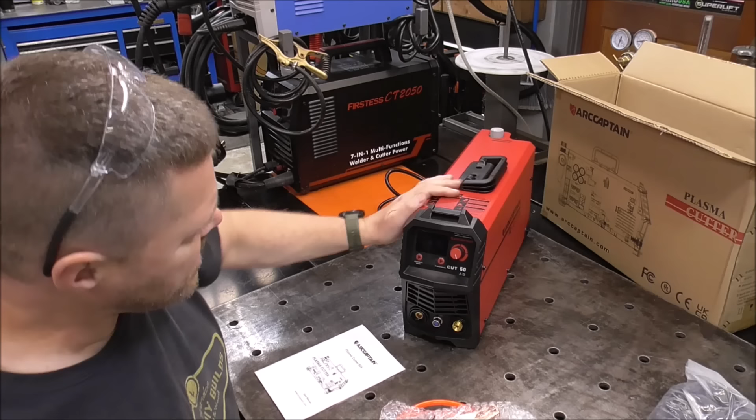Alright, so right off the bat, I'm seeing that it's unusually thin. This is a lot smaller than most cut 50s. Oh, I like this. Look at this. It's got the gauge built into the side. Kind of a little different. Yep.

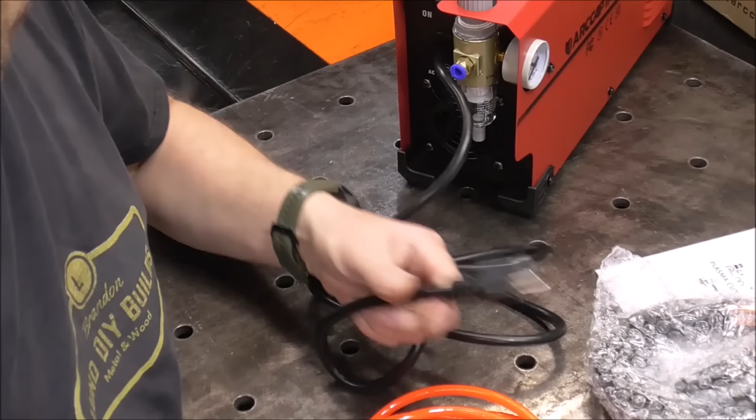Nice compact unit. For you guys that only have 120 volt power in your shop, this will be great for that. But if you have 240, you're going to want to utilize that by plugging this in to this, and then plugging this into your wall.

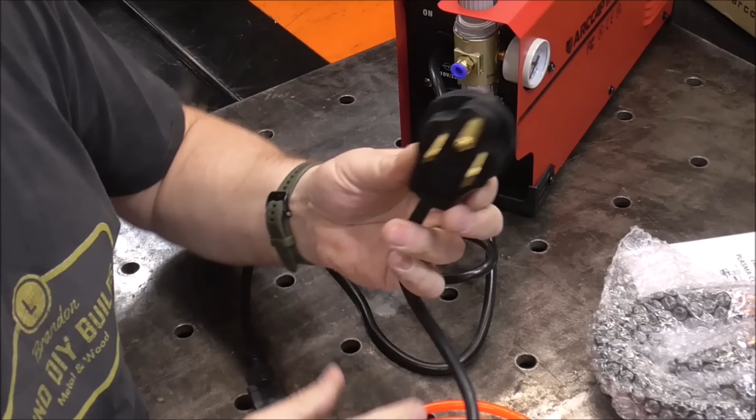I'm going to pull the accessories out. Like I say, these will be a little gently used, guys. When I'm done, I'm going to box this all back up, throw it back into the box, tape it up, and we're going to be sending this off to one lucky winner.

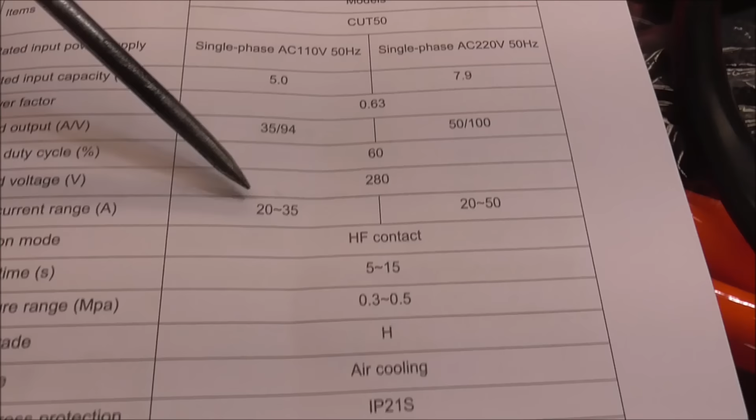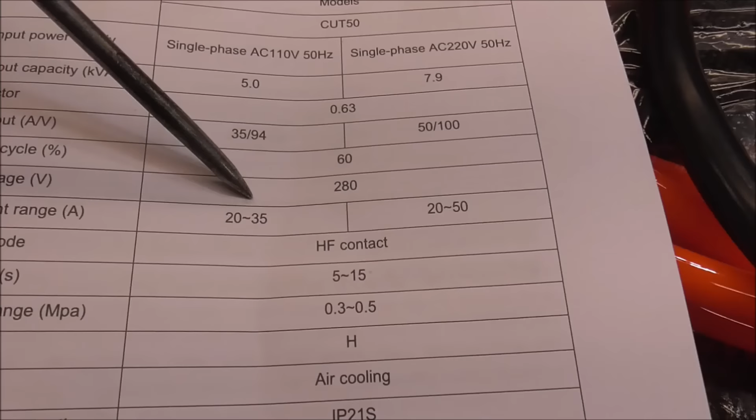Here's some good information you'll want to know. On 120 volts, this machine will go from 20 to 35 amps. On 240 volts, it'll go from 20 to 50 amps. So you get an additional 15 amps of cutting power when it's on 220.

So if you're wondering what that works out to be on cut thickness...

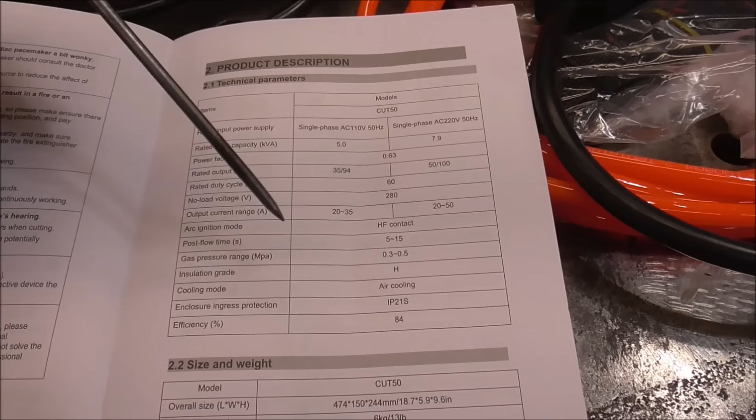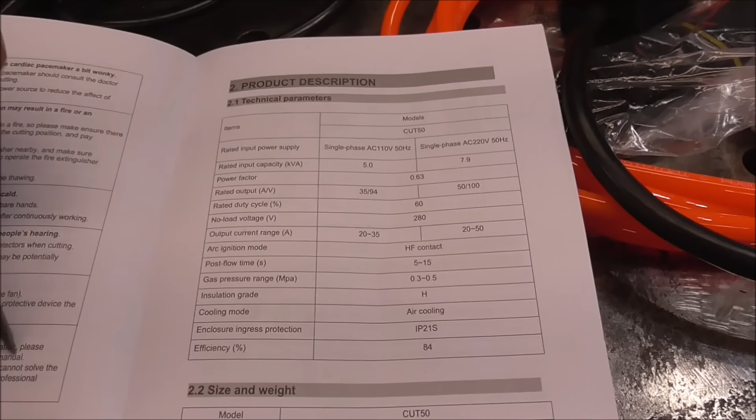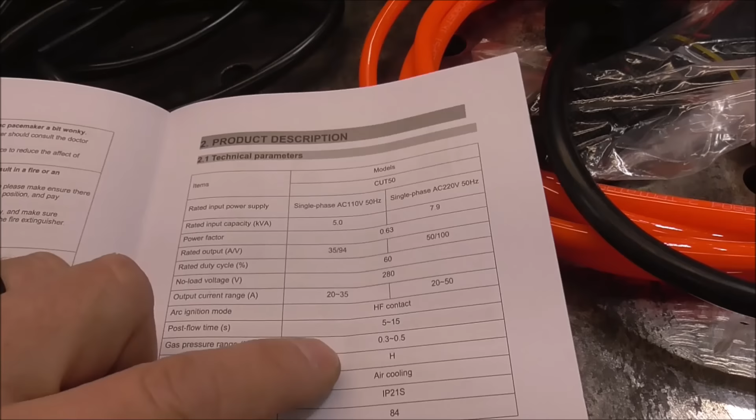Here's the weight on that machine: it's 6 kilograms or 13 pounds. The cutting torch is 16 feet long, or 5 meters.

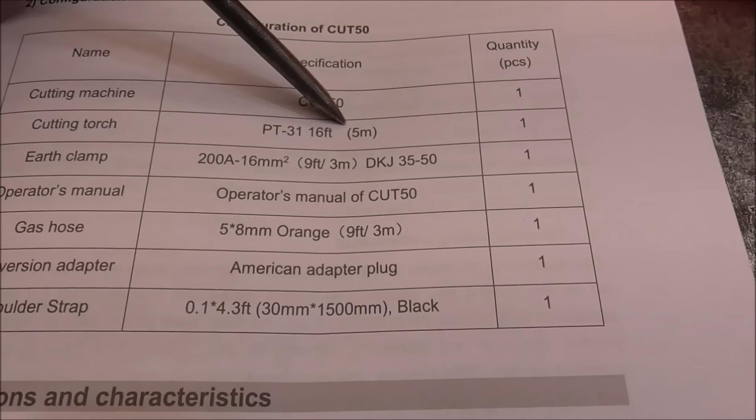This gas hose is basically your air inlet. You push this in there, then connect this end to your air source. I'm not going to use this, so I'll set it aside. What most people do is put an air fitting in this, like a quick disconnect air chuck, then just stab your air hose onto it, so you'll have everything you need if that's how you want to hook it up.

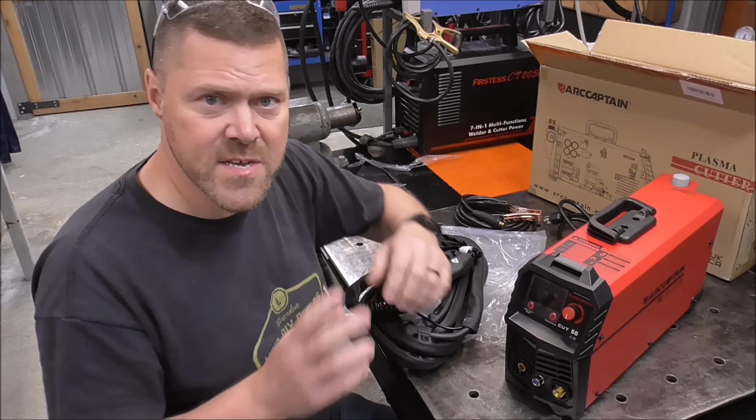If you don't know what pilot arc is, it's this: when you squeeze the trigger, it initiates the arc. The advantage of pilot arc versus non-pilot arc is that it vaporizes any paint or rust prior to making your cut, so you don't have to clean it to bare metal to start the cut. With a non-pilot arc, you actually have to make contact from the tip to the piece you're cutting, which isn't advantageous if you have paint, rust, or it's just not clean.

This is a standard PT31 torch, guys, and consumables for these are super cheap - I mean super cheap. You can buy bags of these for next to nothing, and they're all pretty universal. This is your ceramic cup.

This is what's called a drag tip. It's called that because it has these serrations cut in a cross pattern on the end, and in the very center is the actual business end. This is what cuts - it has plasma that shoots out the center making the cut, and these serrations allow the molten metal to flow out through, so you can set this directly on your piece and make your cut.

However, if you hold a very slight gap, you're going to extend the life of this considerably. But again, like I said, these are very cheap to replace.

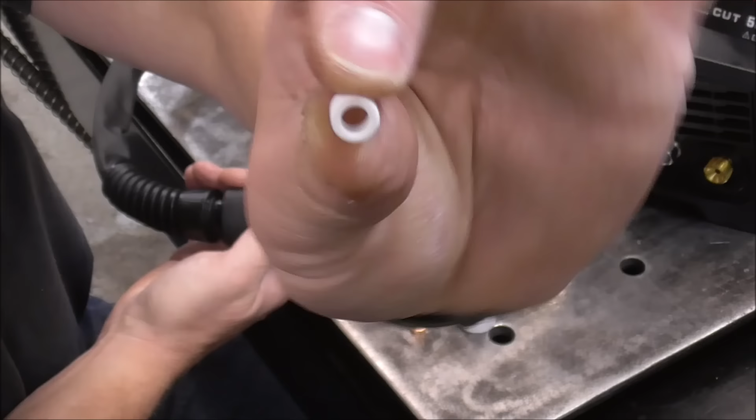Next is this ceramic diffuser - these have little holes in them. Very seldom will you replace that. Same with this, very seldom will you replace this. Generally you'll replace it once you drop it on the ground and crack it or break it.

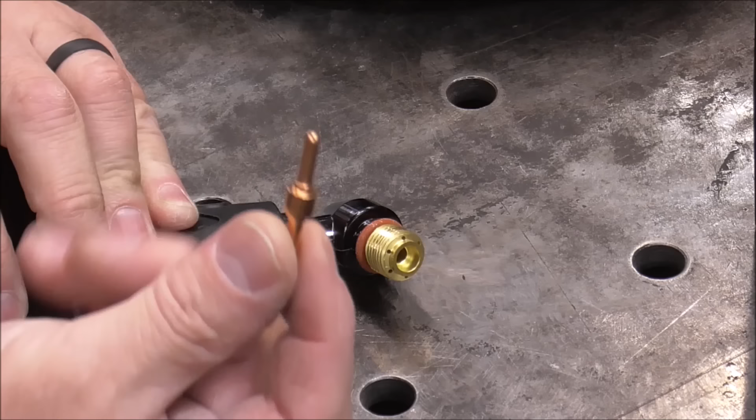And here is the actual electrode that goes down the center. That's what wears out. And that's all there is to this. So let's put it back together. So you have your electrode down the center. Then you put on your diffuser. Then you put on your drag tip or your regular tip. Then you screw on your ceramic cone.

And that's it, guys. That's all there is to the consumables. And like I said, they're cheap. You can get 20 of these for 10, 12 bucks, and they last quite a while.

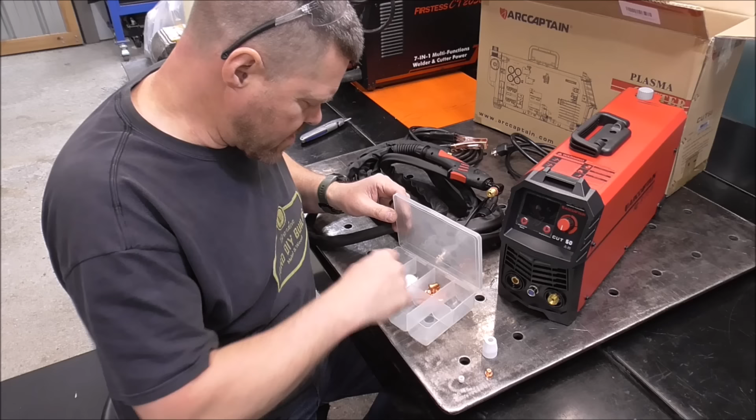I've got a little container here that I use to keep all my stuff together. So let's see, I'm going to need a ceramic, a drag tip, a diffuser, and an electrode. And again, like I said, all these PT31 torches, they're all the same. So I'll do it the same way. Throw in an electrode, throw in a diffuser, drag tip, ceramic. You can see how mine are a little bit shorter, the drag tip, but that doesn't matter.

I'm a pack rat, so I was able to make up this fitting that I'm just going to put into the back. So this side will go into that quick connector. If you guys wanted to build one, this is what I did here. It's got your quick connect fitting here. Then it reduces down to a barbed fitting. It's not pretty, but it'll work, and it'll keep me from cutting into that orange hose that is going to be one of the winners.

This is, you know, 30 years of accumulated fittings and air lines, and this goes on to, you know, a tow-behind air compressor. It's a splitter. There. All right, let's get back to it.

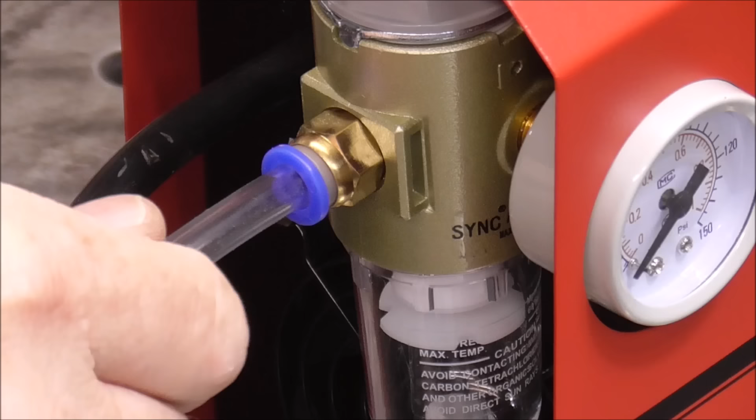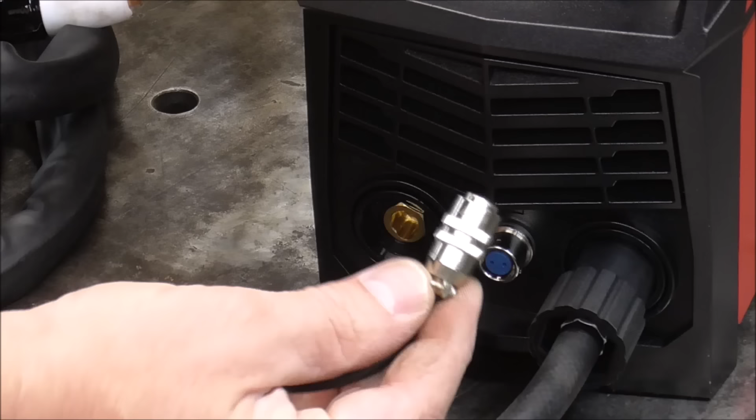We'll take this adapter and we'll just stick it on there. There we go. That's it. And to remove it, you just push it in. It kind of works like a quick connect, but we connect this end to our air compressor. Now with that out of the way on the back, now we just got to screw on the front connection, which is from the torch. Then we attach the control, which is just a quick connect fitting that pushes on. And then we put the earth on.

That's that. So that's all you need to set up a plasma cutter. You just need electricity, you need air. That's it. Because I've got 220 in my shop, I'm going to be running this off 220 volt power. So we'll plug into our adapter. Now we'll plug our adapter into the power.

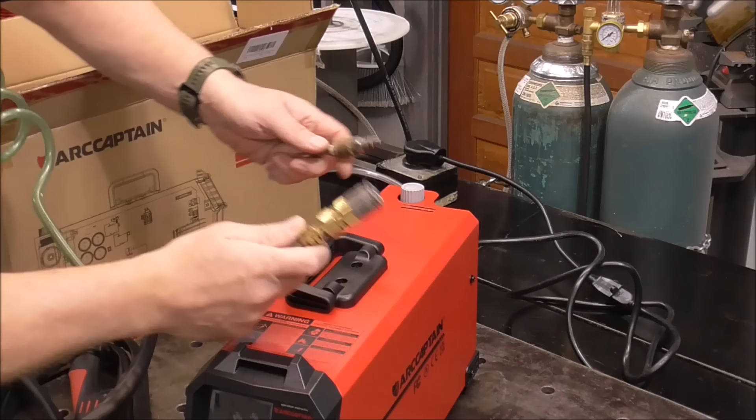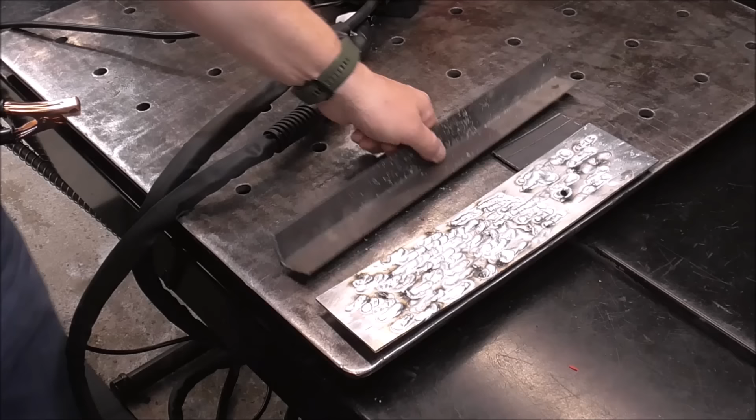Now we just got to supply the unit with some air. Got the earth or ground. We'll clip that right to our table. This is all set up, ready to go. I got some test pieces. I got some old metal bed frame. I've got some 3/16 plate. And I've got some 1/8" aluminum.

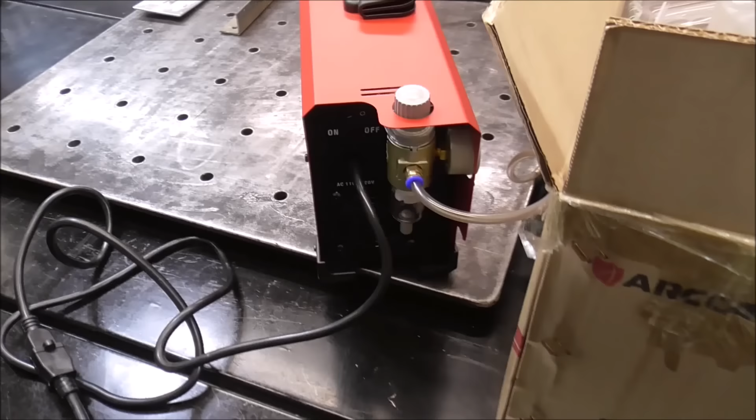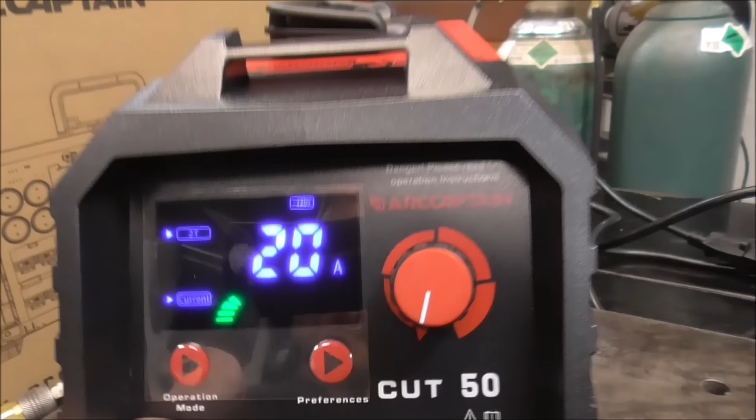We'll go around to the back, turn it on. Oh boy, nice display screen. That looks nice. Run through the settings. So it goes all the way up to 50. Oh guys, I really like that feature. Listen.

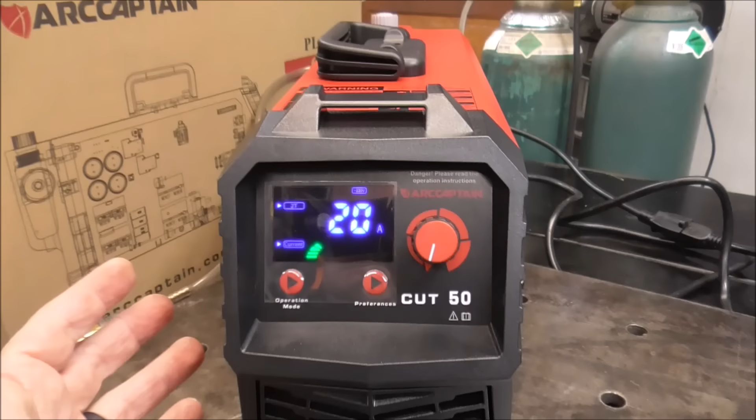Silent. It's about time these manufacturers do this stuff. It drives me crazy hearing a fan run on a machine that is just idling there, sitting there doing nothing when you're not using it. It's just running a fan that doesn't need to be running because there's no heat in it. It's just sitting there. So well done for that.

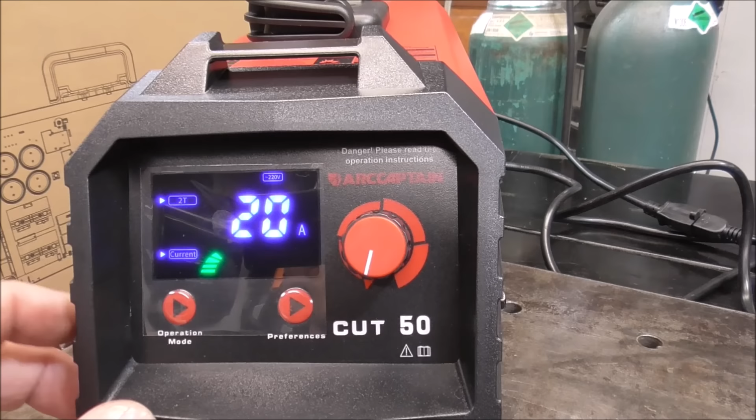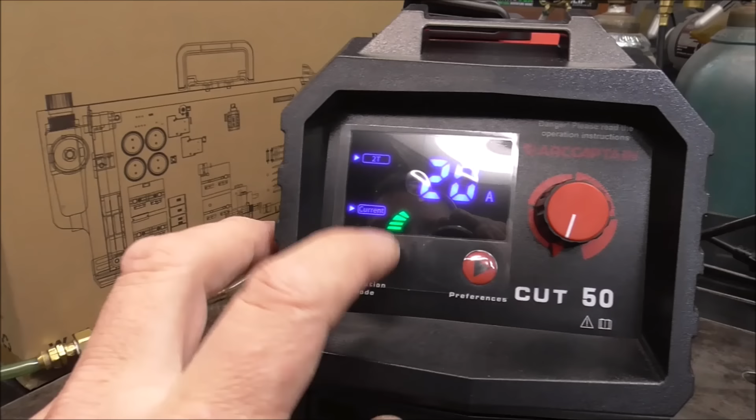Thank you. So the operation mode is 2T, 4T. Basically, guys, 2T, you just pull the trigger, the arc initiates, you let off, it stops. 4T would be, let's say you had it on a machine, pull the trigger, the arc initiates and it stays lit, pull it again, it turns off. So you'll be running it in 2T mode.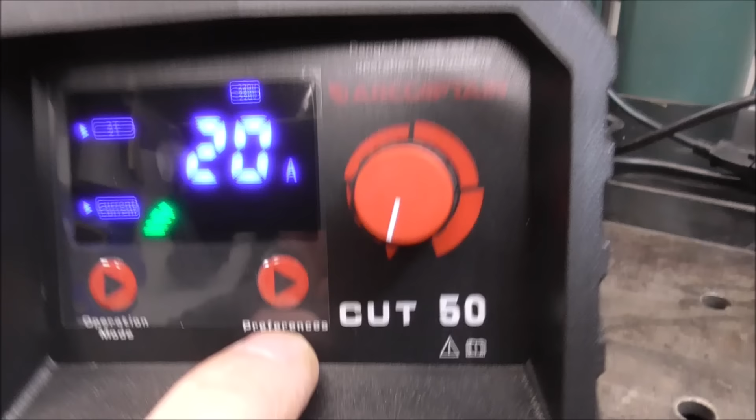The preferences, you can go down to 5, 6, 7, 8, 9, 10, all the way up to 15. And what that does is that gas or air runs through this tip for a little bit just to cool it down after you're done with the cut. So once you let off this trigger, then it'll continue to blow air out the end to keep this cooled down.

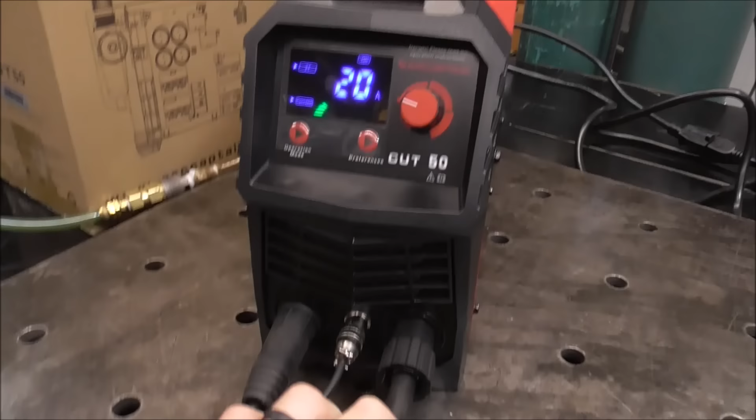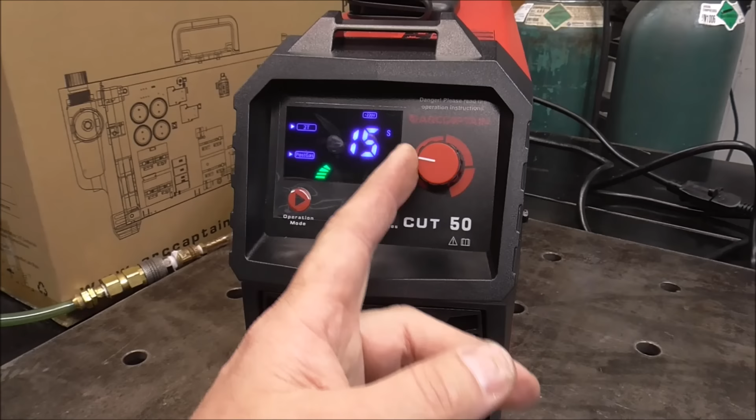So if you're cutting really thin stuff, then you may not want it running for 10 seconds, or if you have a small compressor and you don't want to utilize every last bit of air you have, and you're cutting something thin, you only may want it to go for 5 seconds. If you're cutting something really thick and you're cutting at maximum amperage of 50, you probably want to turn that up to like 15 to allow that to cool everything down, because it's going to be a lot hotter. So we'll put it on for 10. That's about a reasonable setting right there, kind of between everything.

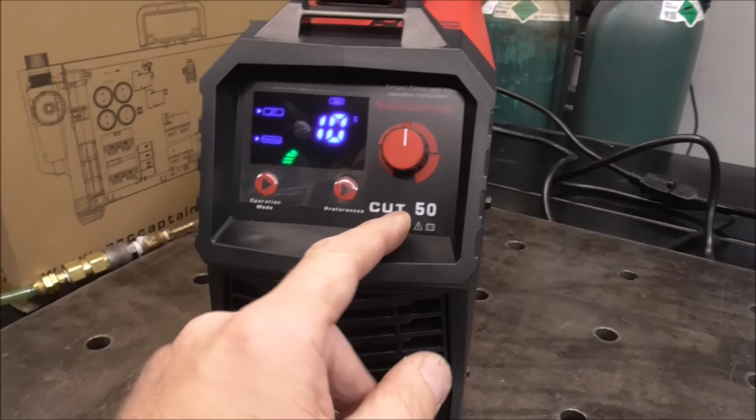Now, if you're cutting inside, you're going to want some safety gear. So you're going to want some cutting goggles, you're going to want a respirator, you're going to want to cover your arms, nice cotton, flannel, fireproof, and you're going to want some gloves. These are just regular cutting torch gloves. And preferably you're not wearing sneakers that have mesh in the toe.

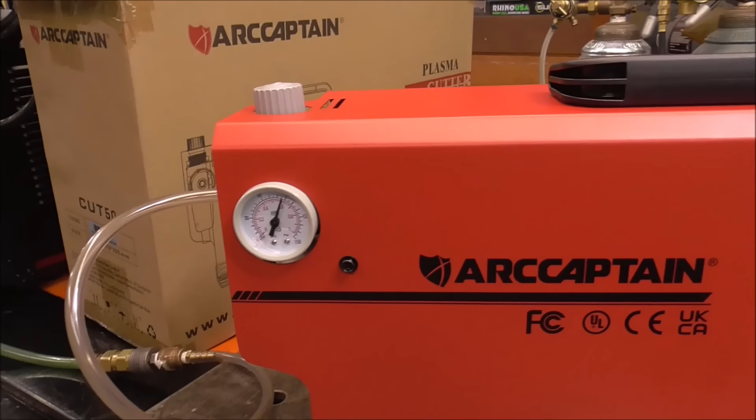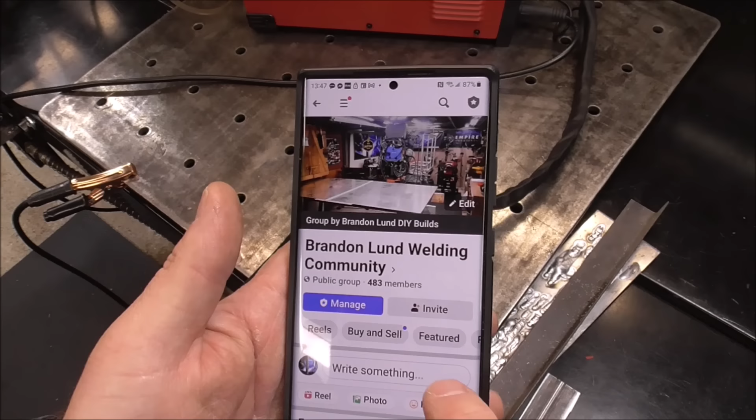Now we've got to adjust our air pressure. We're at 90 right now. Way too much air. We don't want that. So what do we adjust it for? How do we know? If you want all kinds of information, this is what I was telling you about earlier, go to Brandon Lund Welding Community. It's got all sorts of information there. You'll see all kinds of things that people are building, they're interacting and sharing their stuff.

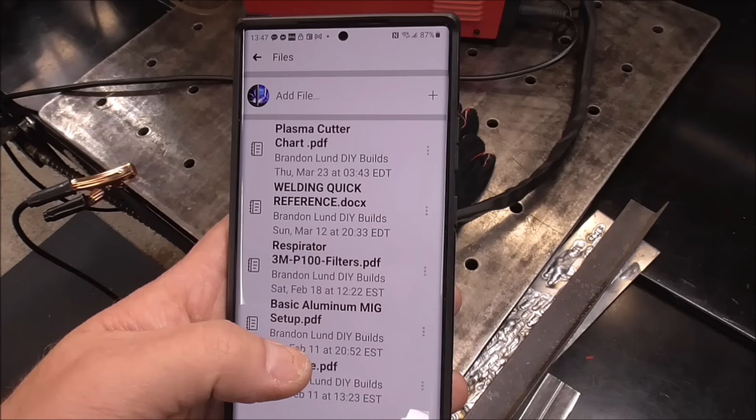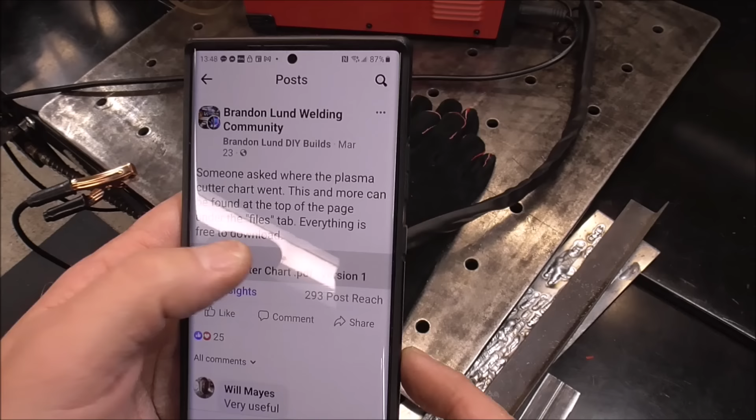But the part that you want is to go here, scroll across, you can go buy and sell, photos, files. Go over to files and then look for the plasma cutter chart. It has all kinds of other things, aluminum MIG setup. It's got the template for a fab table right here if you want to set that up yourself. It's got information on 3M respirators and what cartridges are best for what you're cutting. It's got a quick reference guide for welding, but again, this is what we're looking for, the plasma cutter chart. Click on it, it'll download, they're all safe, and here it is right there.

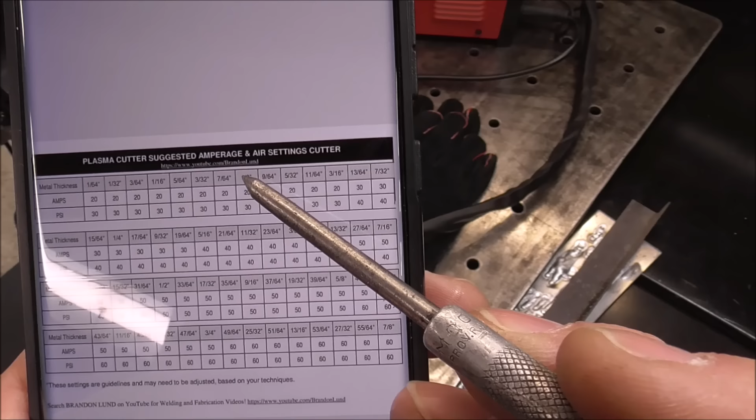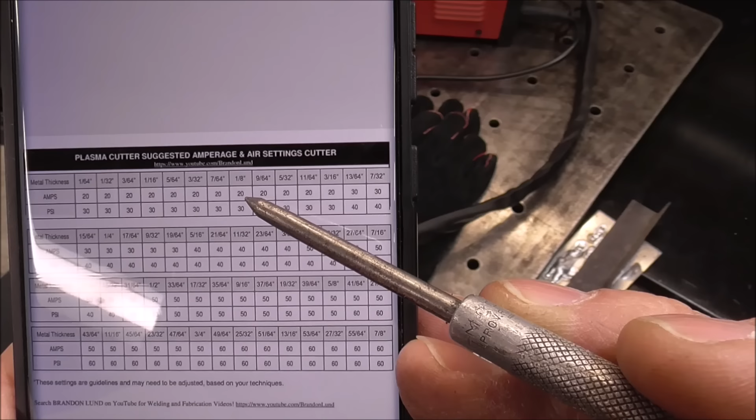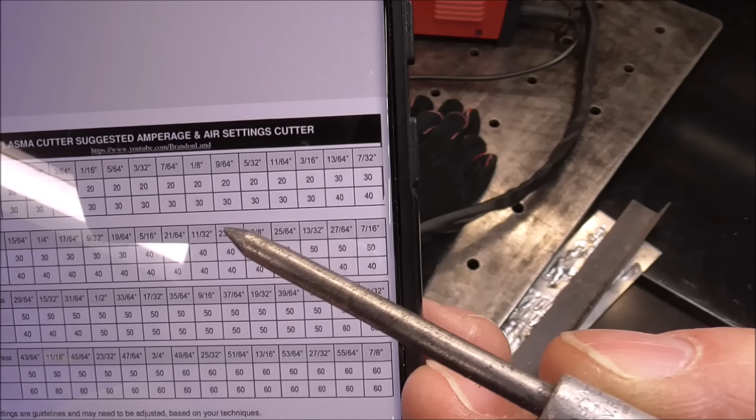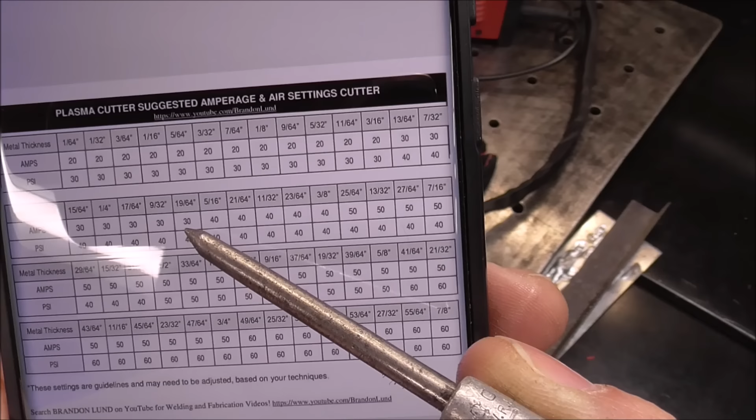So that gives you an idea of what you can cut on 120 and 240 volts as well, guys. Because remember, this I think only went up to, what, 35 amps on 120 volt. So you can cut 1/4 inch, no problem, because that's 30. 17/64, 9/32, between 19/64 and 5/16 is where it switches from 30 amps to 40. So you can cut some pretty thick metal. 19/64 is a couple sizes bigger than quarter. So you can do a lot of stuff on 120 volts.

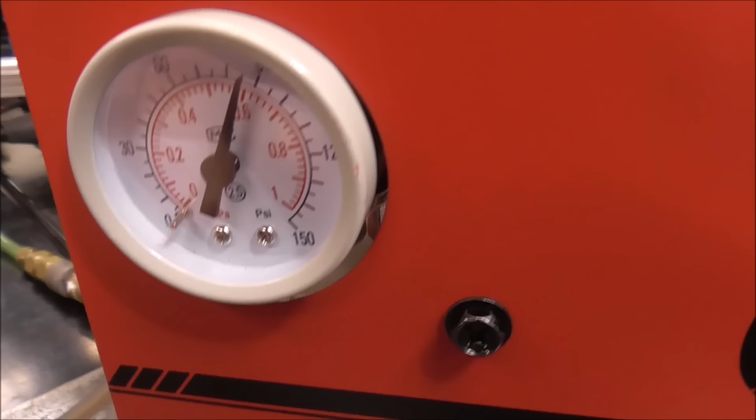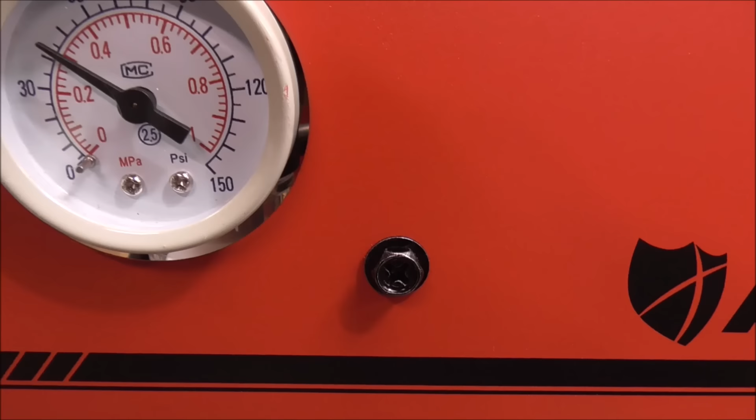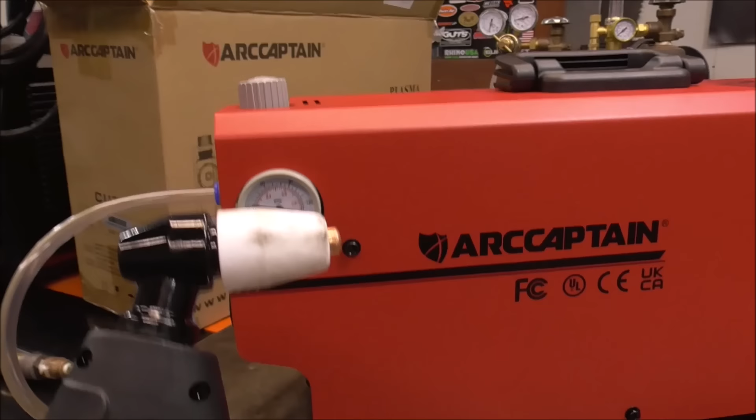But back to what we're doing. 20 amps, 30 psi. And as you can see, we're already on 20 amps. We just have to adjust this to 30. So you pull it up and then turn it counterclockwise to lower it. And if you're a little over, guys, it doesn't matter. You probably want it a little over anyways, because when you're pulling the trigger, this is going to go down a little bit, so we want to check that. So we'll pull the trigger and watch the gauge. Okay, so that's way low. Up a little more. That's pretty close. We'll probably bump it up just a whisker more.

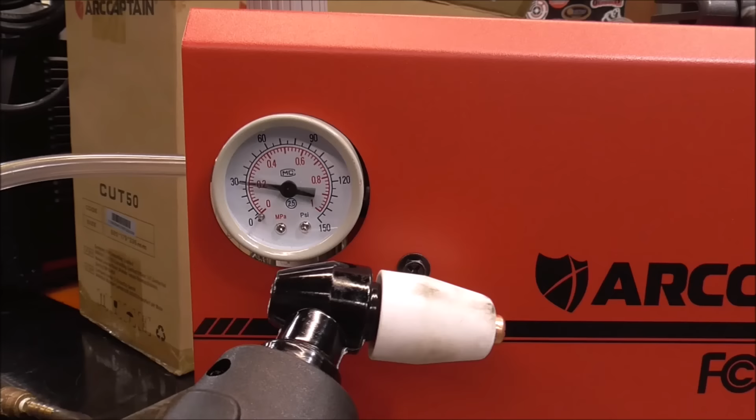And listen to that, guys. No fan, because it's not needing it yet. The circuits haven't heated up enough. So just because you pull the trigger doesn't mean the fan's going to turn on. I'm really loving this feature. What an awesome thought process. Sometimes it's the little things that mean a lot. And I know you guys that have machines that just run and run and run while you're fabbing up your stuff, taking measurements and cutting pieces. How irritating is that, just listening to that fan, wearing the fan and running your electricity up when it doesn't need to be. I love this feature. My Fronius does the same thing. It just sits there quietly until it's needed.

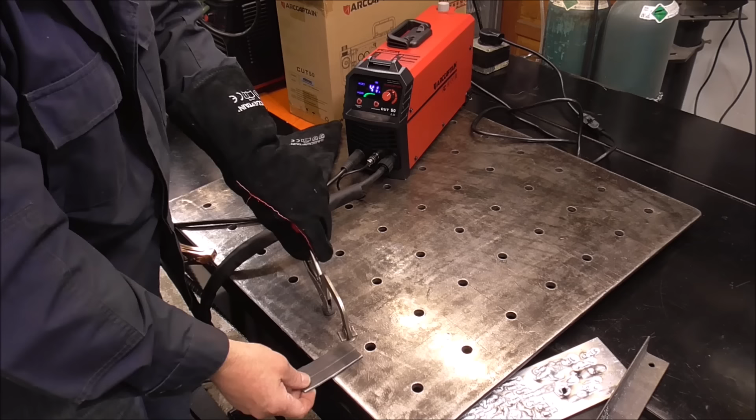This isn't a tutorial on how to cut and how to use it. We're just trying it out, making sure everything's going to work good, guys. I'll talk to you a little bit along the way about what we're doing and why we're doing it, but if you want to know the intricate details, go watch that other video I was talking about. Alright, here we go, guys.

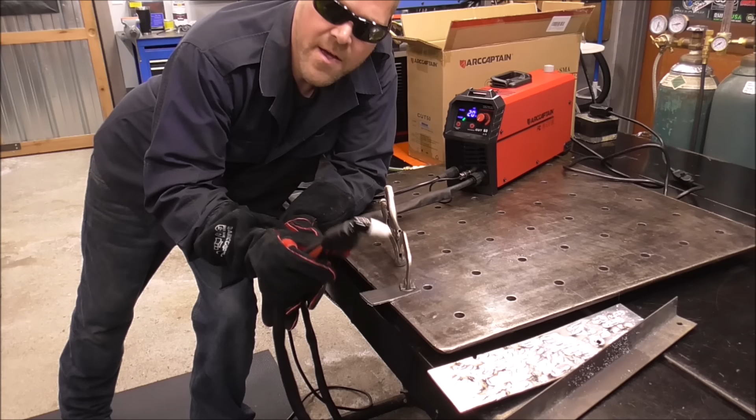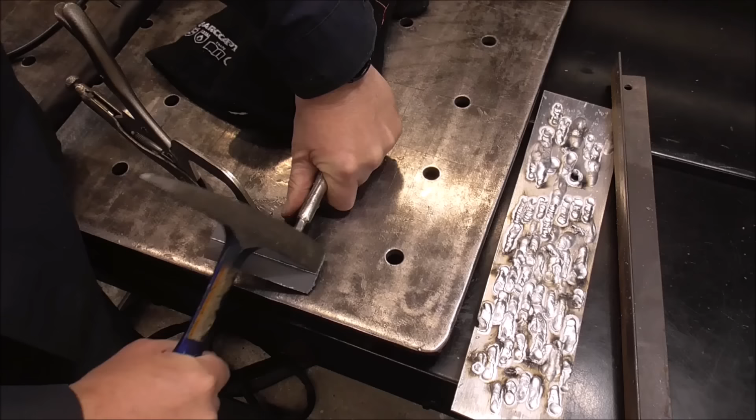Wow, nice. So hear that? It's going to run for 10 seconds after, because that's what we set it for, and then it's going to shut off. And there it is. Now look at that cut, guys. Now what that leaves behind is a little bit of slag or dross, and that just knocks off real easy with a chipping hammer. Requires very little filing or anything else.

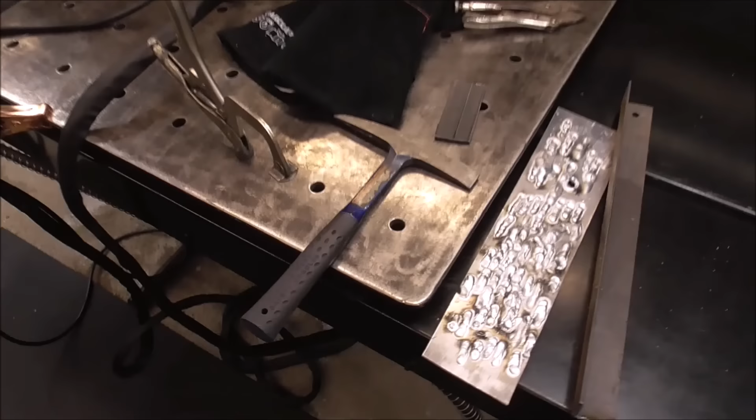This isn't a tutorial on how to cut a straight line, just so you know. This is using it. That other video talks about cutting straight lines. So that was some 3/16. Let's cut some 1/8" aluminum. Again, I'm making direct contact with the metal and pulling the trigger.

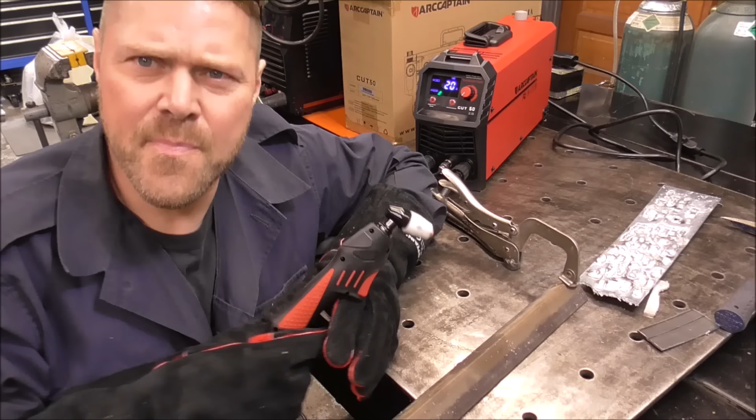And there's that cut. You saw how fast that was. And do the same thing for that. Scrape off the dross with a hammer. Take a flap wheel to that, and you're good to go. A plasma cutter will cut any metal, in case you guys are wondering. So this is a piece of like 1/16-inch bed frame. Let's go ahead and cut this.

I could turn down the amperage and the pressure a little bit, I think, if I remember by that chart. It's not critical, but if you can get the air and the amperage very close to the material thickness that you're cutting, it's just going to extend the life of your consumables considerably. And if you're into saving money, kind of like I am, then that's a good thing. You could always just turn this up to max it out at 50 amps and pound the air right to it. You're not going to get as good a cut, and you're just going to use up your consumables a lot quicker.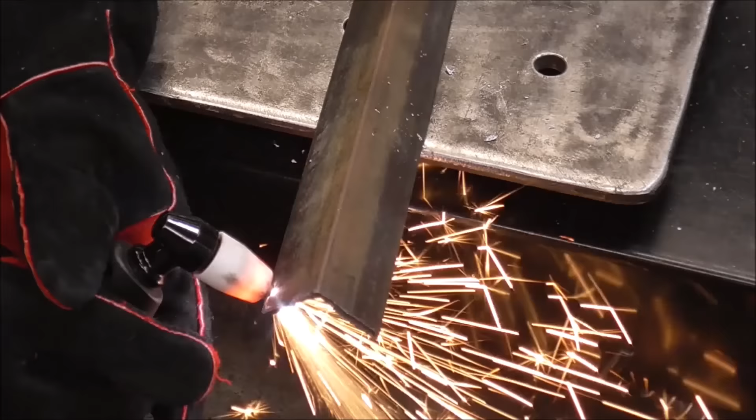And there it is, guys. There's the top. And there's the bottom with a little bit of dross on it.

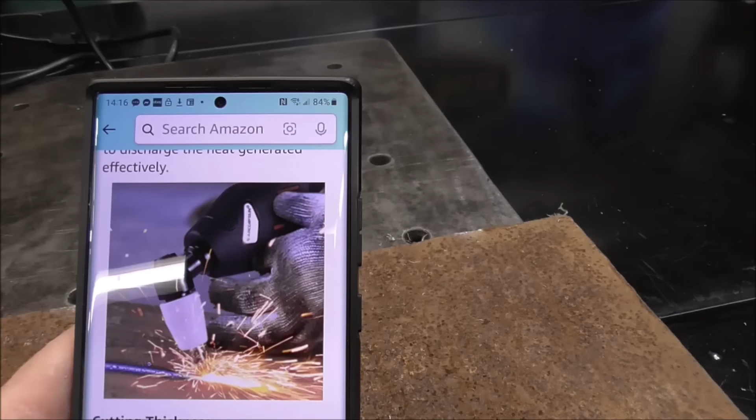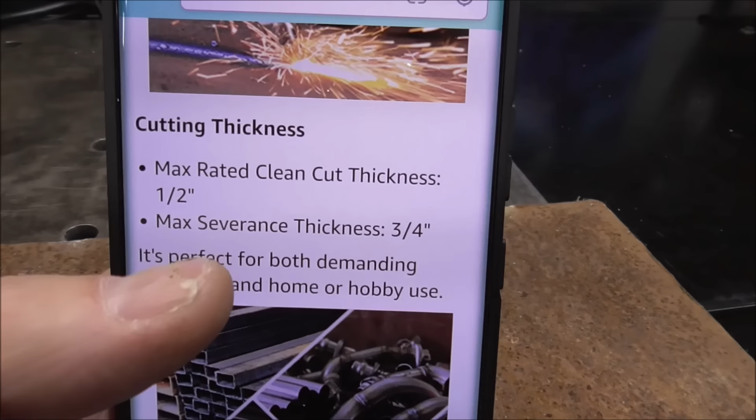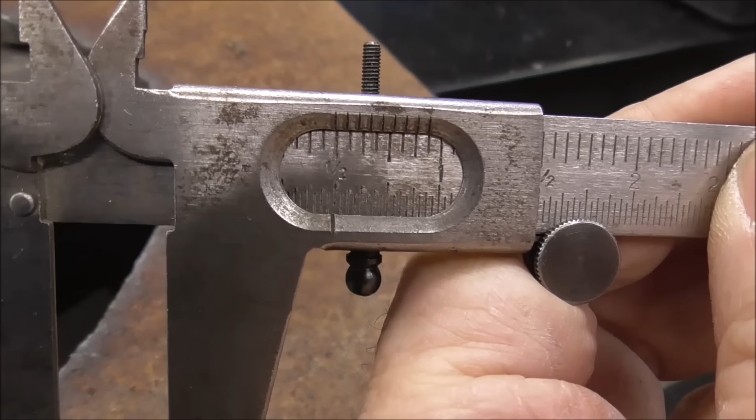Looks like they even water test it, dust test it, and drop test it. What caught my attention is max rated clean cut thickness, 1/2 inch. It also has a max severance thickness of 3/4, meaning that it'll cut 3/4 material, but it just won't be pretty. It's saying it'll cut 1/2 inch clean, so be like Project Farm. We're going to test that. I got a sheet of 1/2 inch plate here, and just to show you. 1/2 inch, you see where that lines up? That also equals 12.7 millimeters.

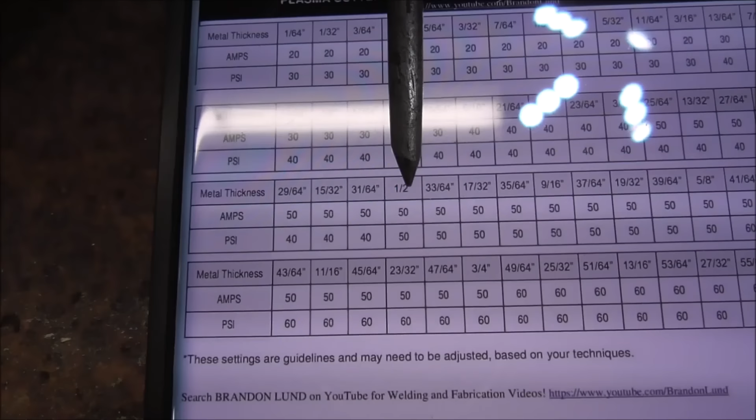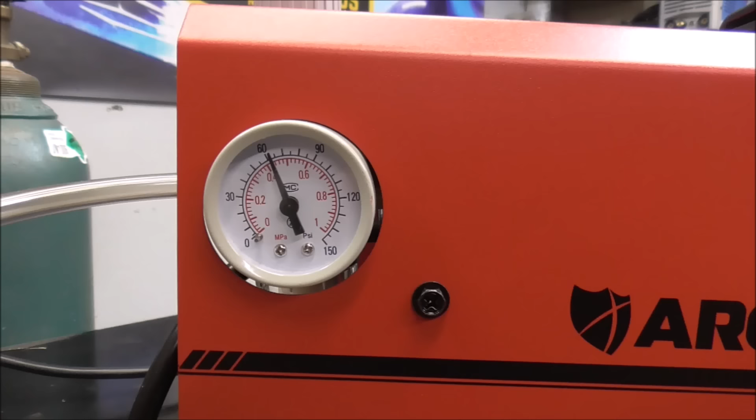So we'll go back to our chart, and we can see right here, 1/2 inch, we need 50 amps and 50 psi. So let's go set it up. We'll probably have to turn this up to like 60 so that it goes down to 50. That's a little high. Back it off a little. There we go.

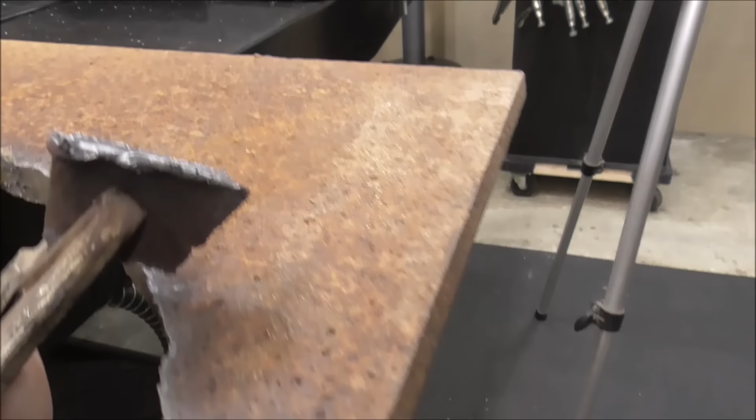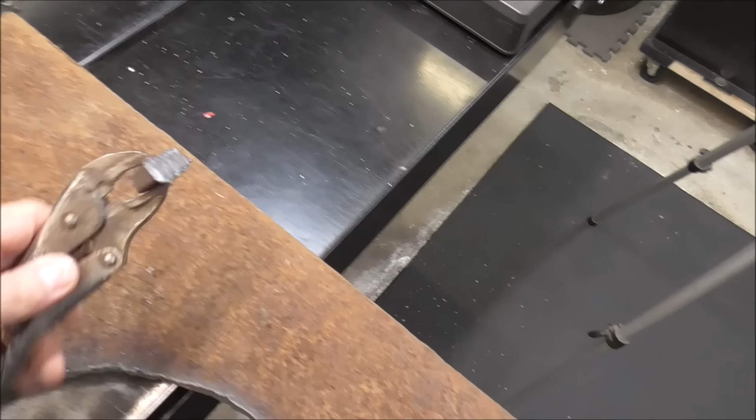It did exactly what it said it was going to do. Clean cut. Just like that. Knock that dross off. There you go. Pretty impressive, guys. I'm super impressed. Absolutely did what it said. I don't have any 3/4 inch plate to check if it'll actually do a severance cut of 3/4, but I'm not working with anything over 1/2 inch. So 1/2 inch is pretty much the maximum limit of stuff that I'd be cutting with a plasma cutter. Anything thicker than that, I'll probably be using a torch anyway.